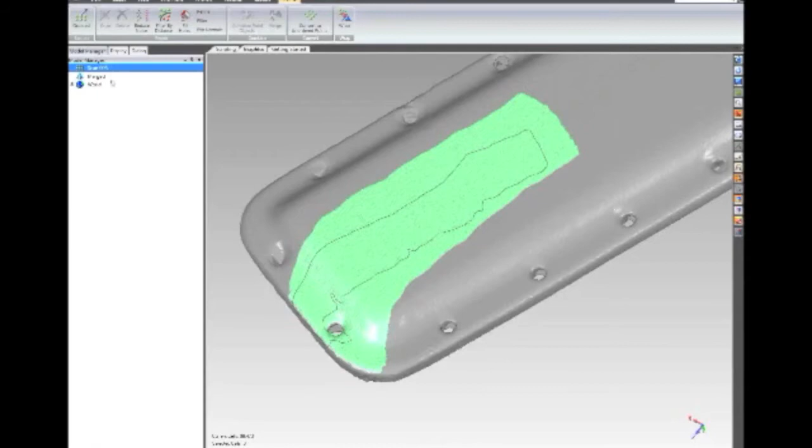So we thought there might be a better way to do that, which is to just use that little piece of point cloud data as a patch and sew it in, stitch it into the existing mesh. So here, you just hit apply after choosing that little patch piece, and you see that it just stitches it in there. It's kind of like hole filling, but instead of just being an interpolative hole fill, you're telling it to use this bit of point cloud or polygons to fill that hole.

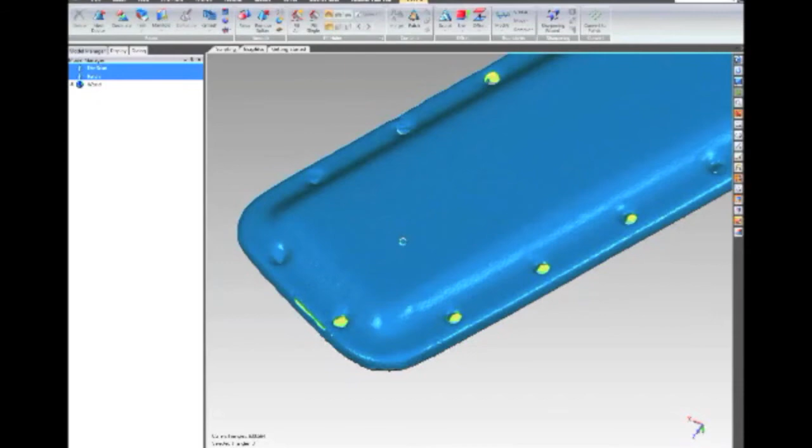A little bit better example is, I'll do this next one here. This one is a bit more of a realistic use case that we started discovering after talking to development: what about the case where you've got similar geometry elsewhere on the part that you want to borrow and apply to a bit of missing data? So here we had a corner that either was not scanned well or was not scanned at all.

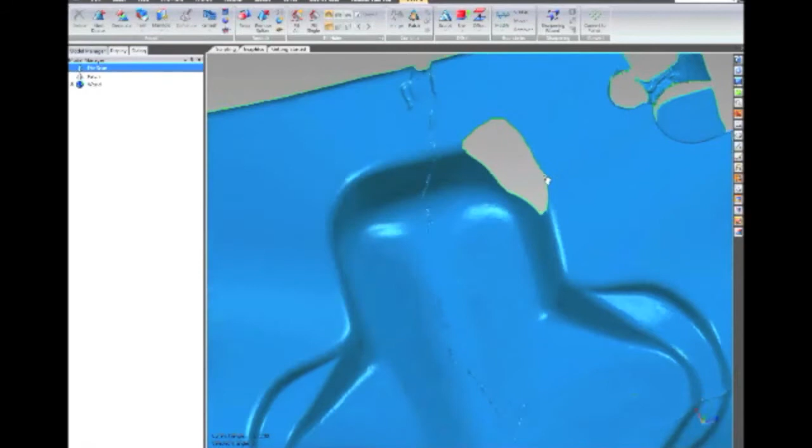In this case, it was not scanned well, so I just deleted it. But I know that I've got this corner over here which looks a lot like it, and this is a symmetrical part, so this part should define it well enough. So what we can do is use our polyline selection tool and kind of rope it off.

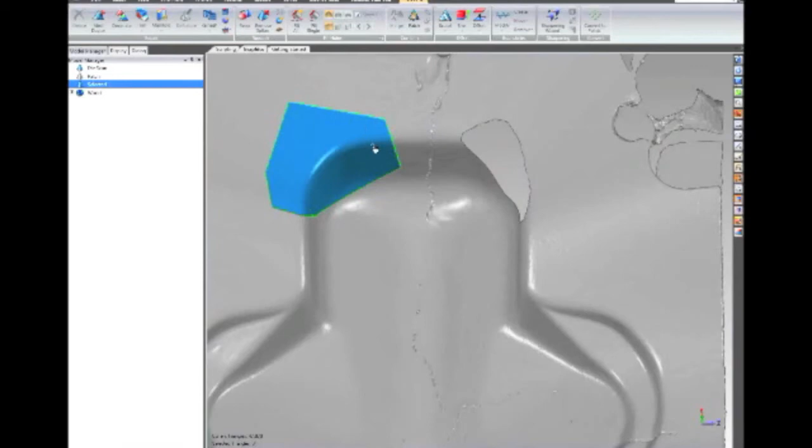We could right-click and say Selection to Object, copy and paste. Then I might go and just mirror this, which I won't show. You just go to Mirror Model and flip it over about the center line. And then maybe you want to wiggle it into place with the Object Mover or Best Fit just to get it snugged in there.

So once you do that, you've got something similar to this. You've got this little patch piece that kind of fits over it. And just like patching some clothing, you want it to be a little bit larger - the patch should be a little larger than the hole that it's meant to fill.

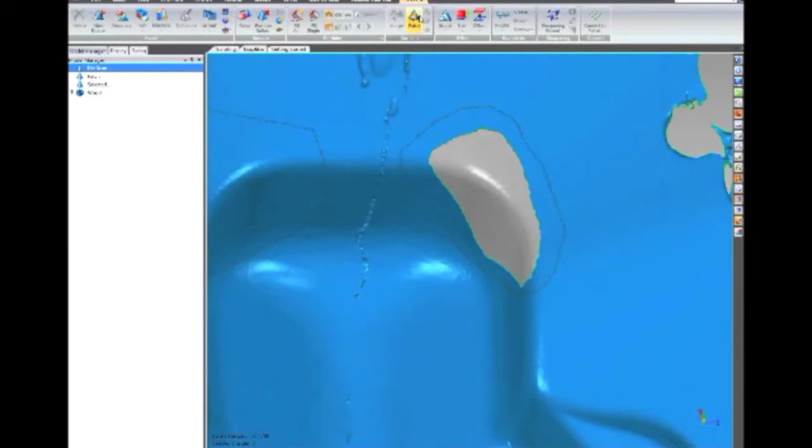So here's what happens when we run this. We go into the patch command, and if we just hit apply without doing any other things, you'll see that you'll get about what you expect, which is it's not going to match up perfectly - you'll see a little seam or boundary there. And this was the initial prototype for this command, it did just that.

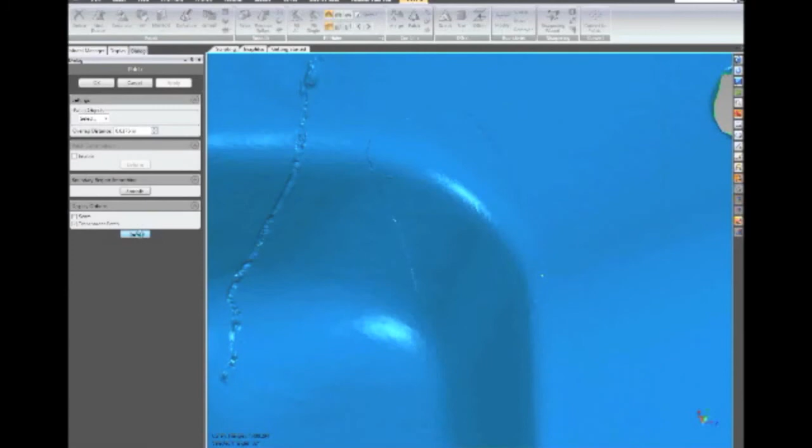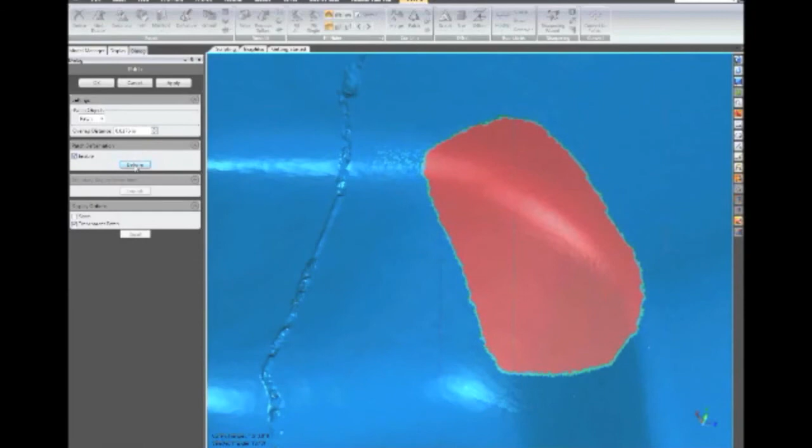However, after talking with development, they said one of the things we could do was actually enable some deformation and allow it to smooth. So here you can see these little white whiskers - these represent the order of magnitude of the deviation. If I just hit deform, it's hard to see live, but it'll warp that patch to fit better onto the mesh, such that when I hit apply now, because those geometries match up a bit better, I get a better result. Now you'll see that it's really hard to tell that there wasn't actual scan data there to begin with.